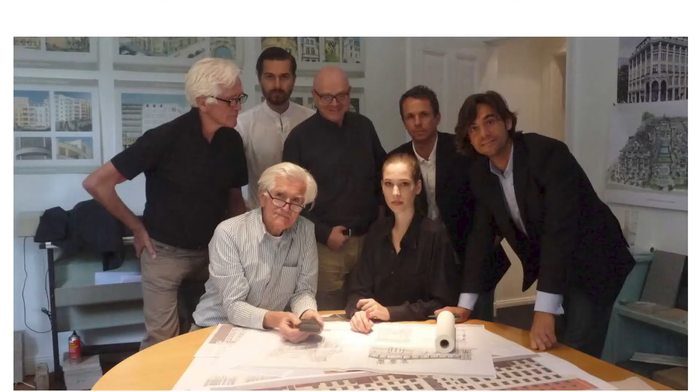And we have two teams. The original head office, where I work with two cousins, has around 35 people, and then we have another team run by my other cousin with almost another 30 people. So it's a substantial size, and we do a lot of projects of all sizes, from small projects to larger projects, and it is fun. I might come back one or two times to the fact that my father and my uncle are identical twins, because that is probably also of importance to me and to the way we think.

Or maybe I'll start with that right now. We started doing more classical architecture around 25 years ago. I was a student at the time, and that led, of course, to a huge controversy and hard fighting and bashing, actually, through the media, through the architectural critics in Germany. And I think if you are trying to face that alone, it's always hard to overcome things.

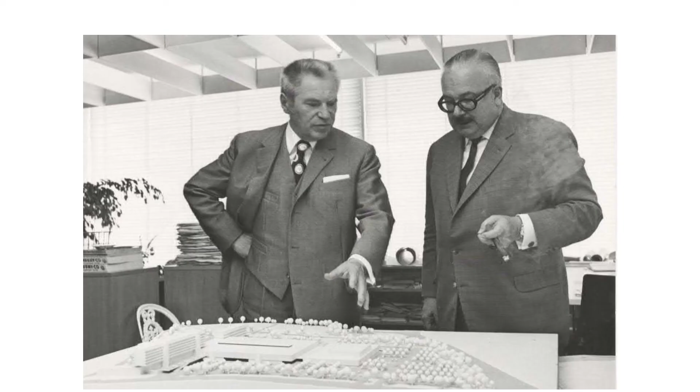Now here in this picture we see, maybe from the 60s, two people, a client and an architect, looking at a large-scale project. And already the way they look at it shows you that there is something wrong with the perspective. We as normal people, when we experience a place, a city, anything in the built environment, we look at it, we walk through it at a normal eye level height, and that is also how we should perceive architecture while we plan it.

And especially in a lot of large-scale projects, skyscrapers, high-rise buildings, big blocks, in the design process you look at the projects from above. You look at the grid of the cityscape, and you take up some lines, and then you create some intellectual concept. But very often, it's missing the part for the normal people to just walk around. And in every design that we do in our office, we do sketches.

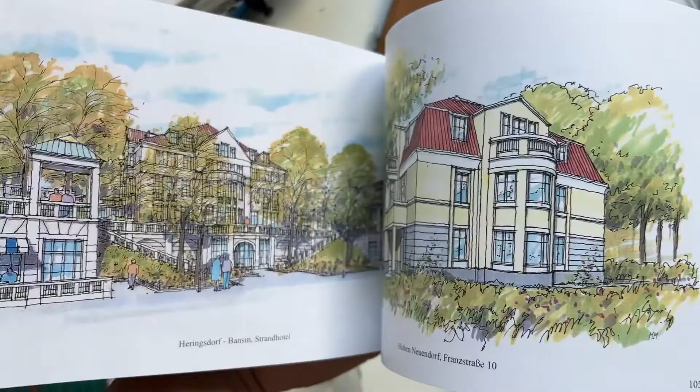I don't have any sketches in my presentation, that's why I will pass around these 2 books. In fact, all the initial concepts in our office we do as hand sketches, because in that way we are not stopped in our creative process, whereas if we were doing it in the computer immediately, then you already have to say, okay, I'm drawing a parallel at 80 centimeter distance. So maybe you want to have a look and just pass it around. It's just a collection of hand sketches.

Another point that I want to get into is what I call granularity. And I'm showing here a contemporary building. Both of it is brand new, just completed last year. It's the reconstruction of the Berlin City Palace, together with an addition by Stella, the new part. And so both of it is new. Both of it has not been there before, or in between it was not there. And I want to take this example to give you an idea of one point that I want to make.

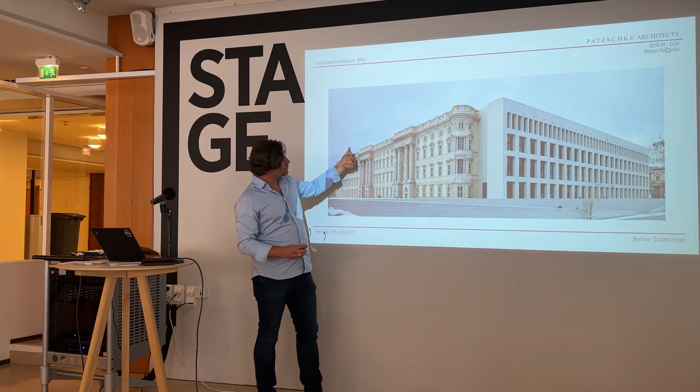And we don't even know where the entrance of the building is. Here it is very clear, and if you go around, you know where it is. Here we actually have to make a signboard to see where the entrance is. Of course, this can also have a quality together. I'll come to that in a moment.

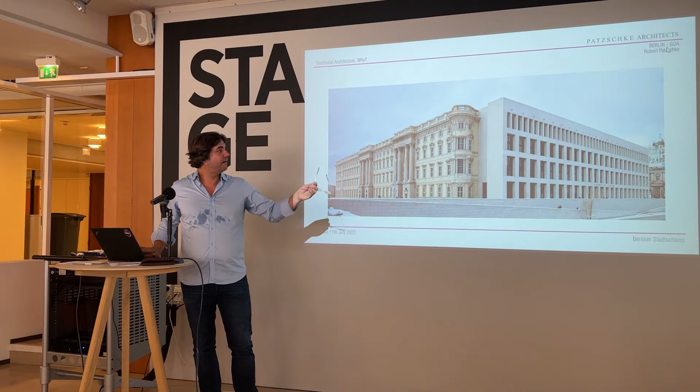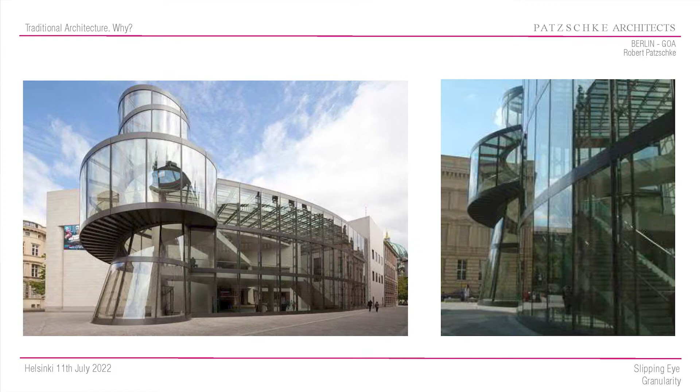So from my point of view, you approach this building from a distance of, say, 100 meters or so. You have more or less understood the shape. In the earlier one, probably even at a further distance. And when you come closer to it, you don't really experience much more. Maybe I'm doing a little injustice to this building because it's a really fantastic example, and in the interior there are some interesting elements. But what I feel here is that after a certain point, you don't experience more, and you lose that stimulus.

And if I walk along this road, my eye just washes away on the glossy surface of the building. Now, of course, these things can go well together. Like here in this particular case, you have the traditional historic building, and you have the modern new building. And again, they can complement each other. But from my understanding, it's usually the classical, the historic building that adds more to that than the modern.

And again, we have here the idea of the granularity of the total entity, because together we can say, okay, it's a great concept, and together it works, but only because we have one part of it that has that complexity in its design. And we can have that at all kinds of scales. We can have that with two buildings next to each other. We can have that within one building. I don't know if you have these examples in Helsinki a lot. In Berlin we build a lot of attic roofs on the old buildings.

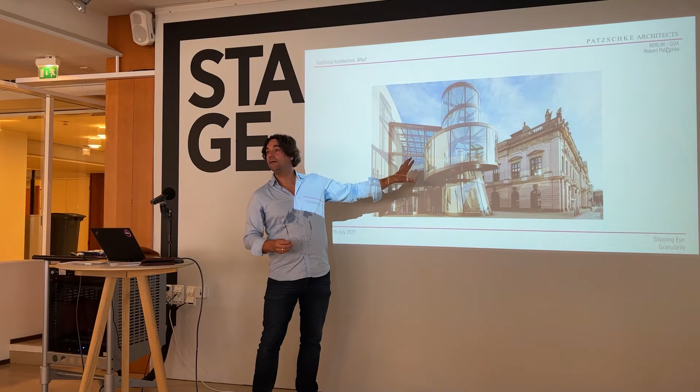So very often you have an old building and then you have a modern roof on top, and that develops an interesting composition. But I feel that if we had a city that was only made of these elements, then we will end up with something that is not satisfactory the way that we see traditional and historic centers.

I mean, I don't know about you, but if I go on holiday to any country, like Helsinki, for example, I look at the historic center. Very rarely I go and see the modern districts. I think in Paris, maybe a few architecture students might go to La Défense to see that, but in general, the people go to the historic centers, and that already shows us that there is something more to it than just beauty.

Now, of course, we have also started with modern architecture in our firm. This is a building, one of the early buildings from 1974 in Berlin from our office. So it took us really a long time to go through this process. But eventually we realized that we have to take a new road, a new path.

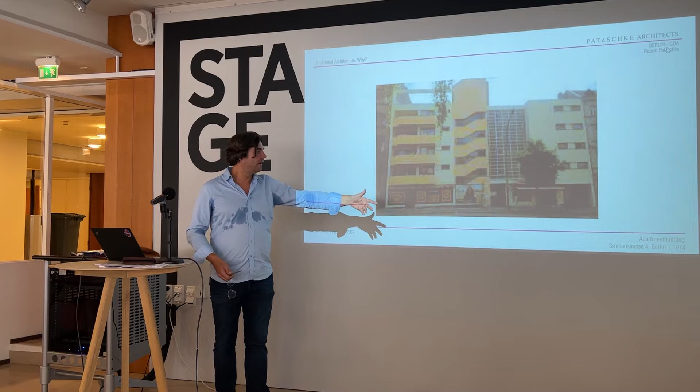So I've already shown you this beautiful building from the 1970s. When I asked my uncle about it a couple of years ago, he said, "Oh God, for 30 years I'm not driving through this street because I hate this building so much." And that shows another very important thing, and that is responsibility. Architects and urban planners have such a great responsibility, because once a building is up, it will be there for a couple of decades. We can be lucky if this building is pulled down now after 50 years, but maybe it will be there another 10 or 20 years.

And that's why I think that nowadays, and that's also how I was trained at university, each student was trained as if he becomes the most special architect. And every time you make a design, it should be something really special. And we in our firm actually want to step back a little bit. Of course, we want to do a project that has quality and that is also exceptional in a way, but it should not necessarily be standing there and crying out, "Here I am." So I think it is more important to look at the responsibility that we have as architects than to selfishly just build one special building after the other.

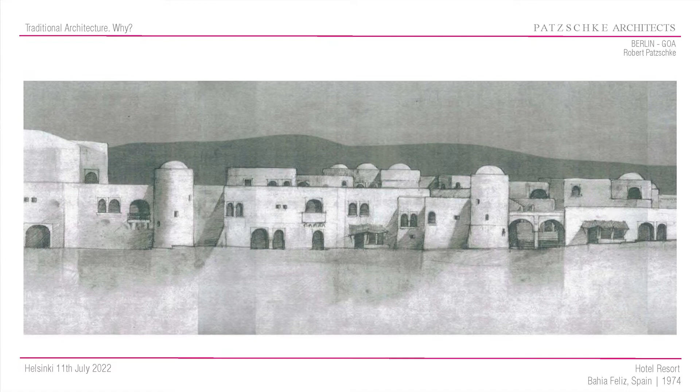Then more or less at the same time we designed, not me, I was 2 years old in 1974, but we designed in our firm a hotel complex in the Canary Islands. And this is probably the first time that we got into a traditional mode because of the location west of North Africa. The idea was to build up a kind of bazaar and get these Moroccan elements into it. So already there was the idea to have something maybe not classical traditional, maybe more vernacular or rural traditional.

At that time, shortly after reunification, the Kempinski group was looking for an architect who could build a new Grand Hotel on the site of the Hotel Adlon. They tried out a couple of architects, but they were not really happy. And then through word of mouth, they landed in our office, which was at that time, of course, much smaller. And we were appointed without a competition directly by Kempinski to do the design of the Hotel Adlon.

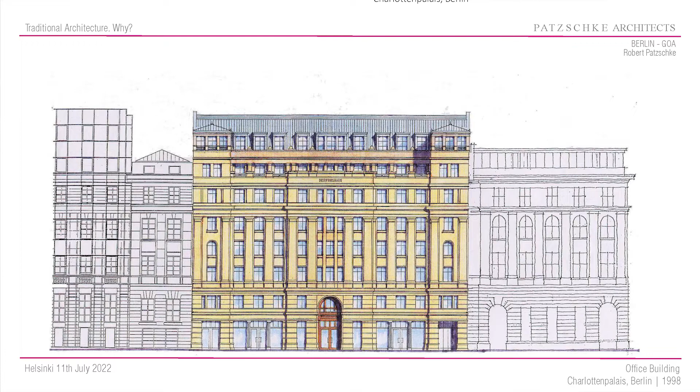Then what we do is office buildings. Our firm is actually more known for high standard residential buildings. But to be honest, traditional architecture is much better applicable to office buildings, because in office buildings like here, you have the possibility to do fairly repetitive bays. That sort of work is more difficult in a residential building where you have a kitchen next to a bathroom and you want a big window there and a small window there. I'll show you examples, of course.

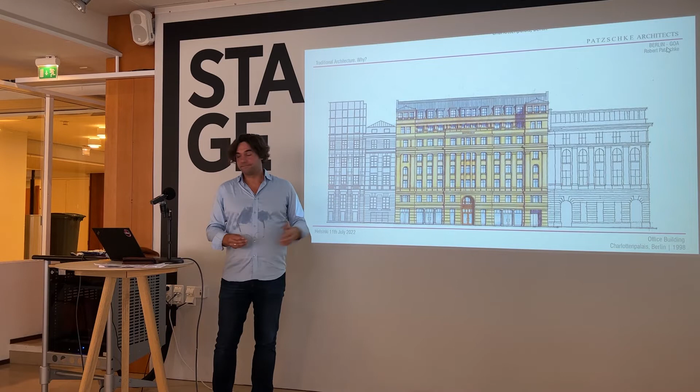So here we have an office building, and this is actually, from our whole portfolio, one of the most classical projects that we did, with heavy natural stone and really intricate woodwork at the door. So here that kind of granularity, that kind of approach, I think, is very visible. You have a building with a main structure with a giant order, and the closer you get, the more you feel the texture of the material, and even when you get in, you have that detail in the main entrance door.

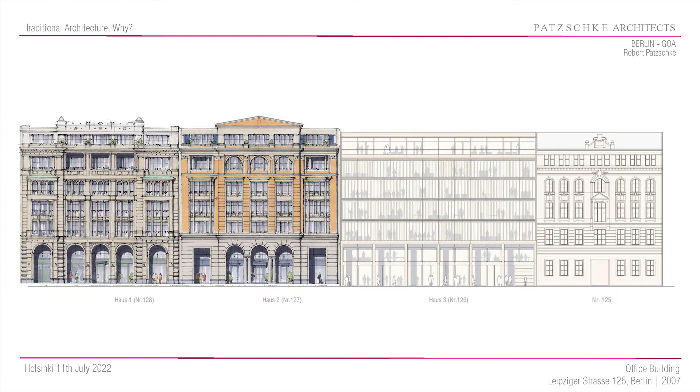How much are you focusing on using the classical elements on the outside of the building versus using those classical elements also on the interiors? It's a good question. It depends really. Usually what we do is condominium apartments in the majority of our projects. And there we usually have the entrance lobby in a fairly classical way. I mean, there are architects that are much more classical than we are. If you look at some of our British colleagues, Robert Adam, they are very elaborate. So we have even in the interior classical elements with a wall cladding and a flooring, but I would say not too much. And then the apartments themselves are fairly simple. And then the buyers of these apartments come with their own ideas.

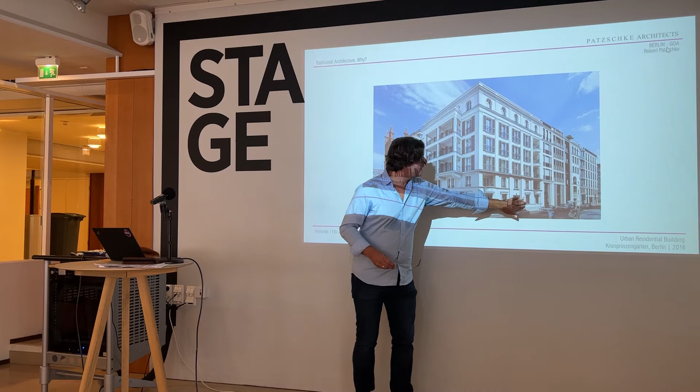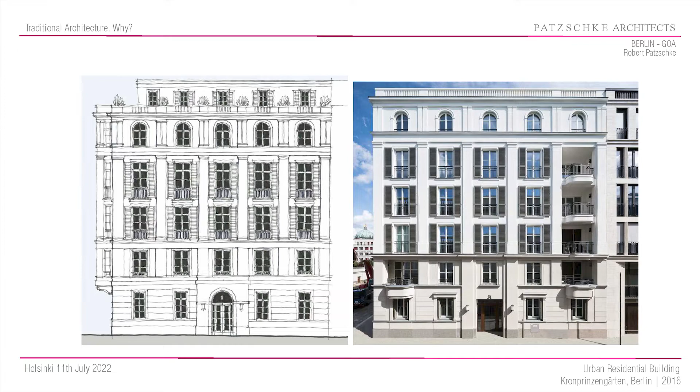Here we come now to residential buildings. Yeah, so this is a larger complex. We've built 2 buildings in that complex. This one here and one small building here, which I'll show you later on. It's interesting here to see the initial sketch and the way that we have built, coming back to readability, and also to the difficulty we actually face here in traditional architecture, because we had proposed a giant order for this building. And if you have a facade like this, you cannot move the window by a centimeter or make it larger or wider. All has to be in exactly that grid. And we see already here that we needed more balconies.

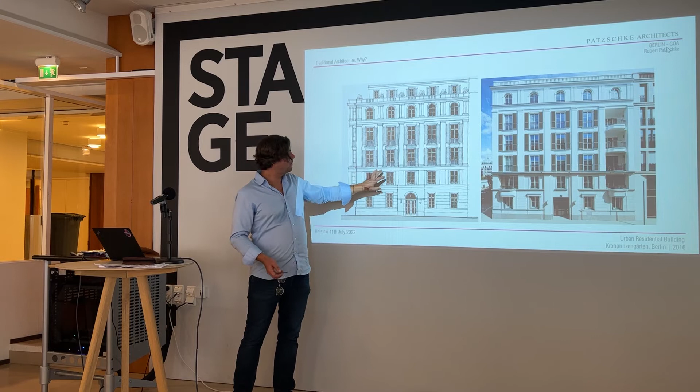There are balconies on that side here, but because there are 2 apartments on each floor, we needed also balconies there. So one bay was turned into balconies. And then on the lower floor, it was even more divided into smaller apartments. So we have that loggia on both sides.

Now, I think at the end, it is also interesting if you have a repetition or symmetry, that you break that repetition or symmetry somewhere, so that you also break that monotony. But at the same time, you can see here that we also end up in a conflict, in a design conflict sometimes.

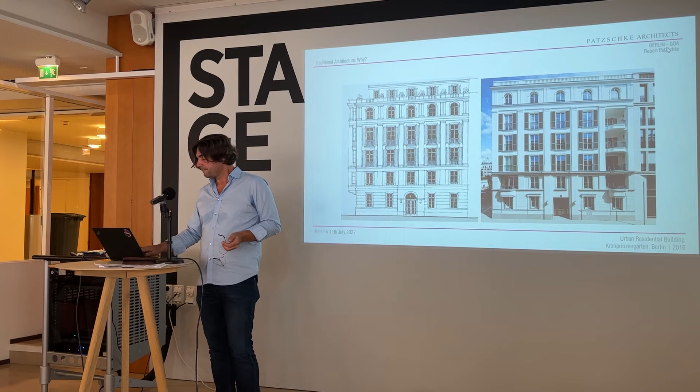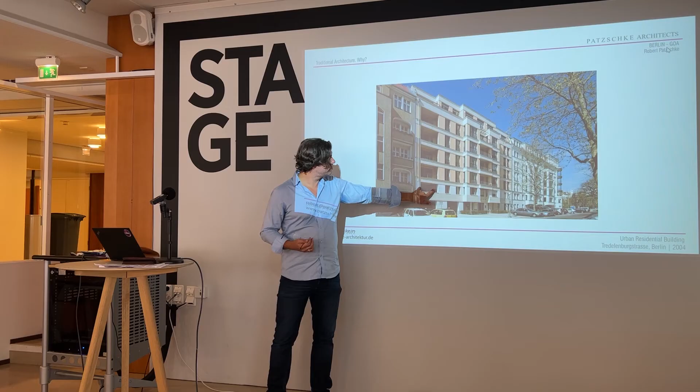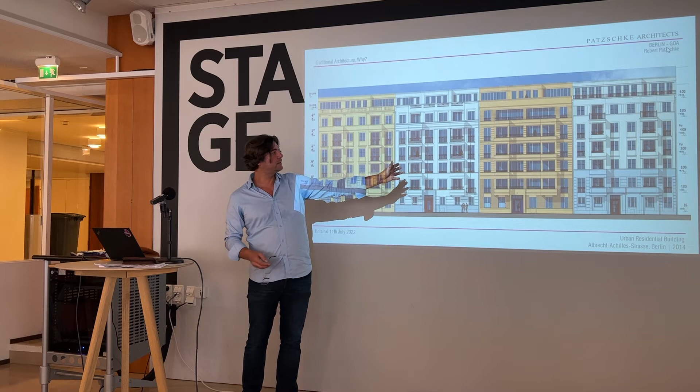And I'm showing this project because it comes back to that idea of granularity, because here this was one site, so we could have also built it as one big block with one architectural language, but deliberately, because this is more or less the typical Berlin parcel or plot size, we've turned it into 4 buildings. They are more or less identical in floor plan, except for the sides, because of the shape of the plot. So we've got a repetition for the developer.

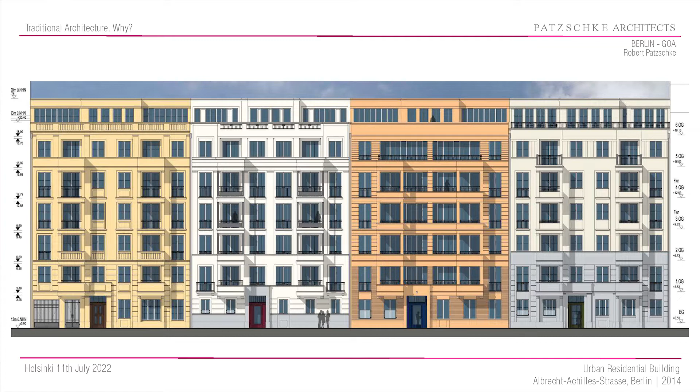We've got that, how do you call it? Come to it in a moment. We have a repetition here. At the same time, we have given each building a little bit of a different appearance with different elements, sometimes with color, sometimes with different elements. Here we have a fixed balustrade, here we have it in a different way.

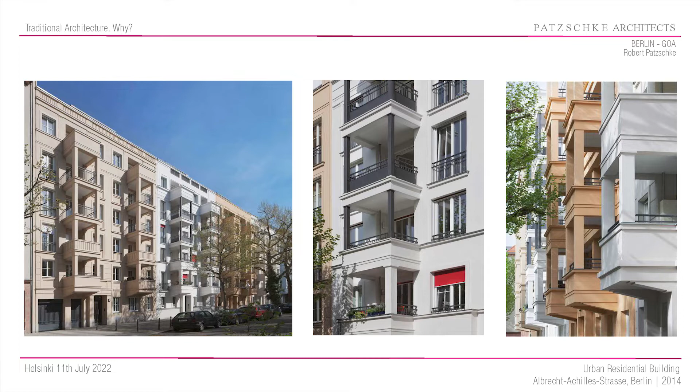And so what happens then at the end, each building has some sort of identification. So if I buy an apartment in one building, I know exactly it is here, and it is not in block A or block B, where I can only find my entrance through the number, but I can identify it with the building where I live in a better way.

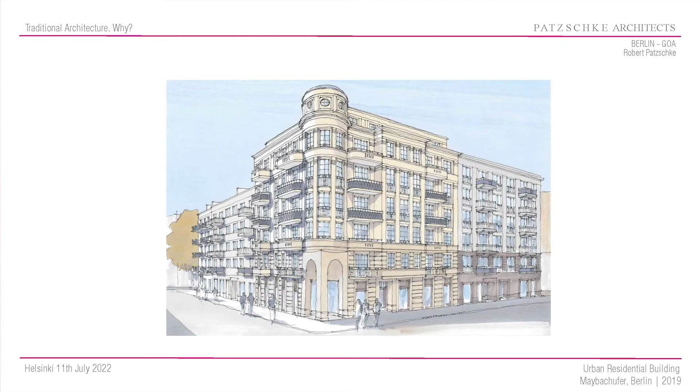Here, one more residential building. This is one of our, not latest, it's already from 2019, but one not so old project. Here you see the early sketch, and this is actually how it came up. So we explore more round ideas. Actually, I don't know if it's also in Allan's pictures later on. It's actually a very common feature nowadays in architecture in Berlin.

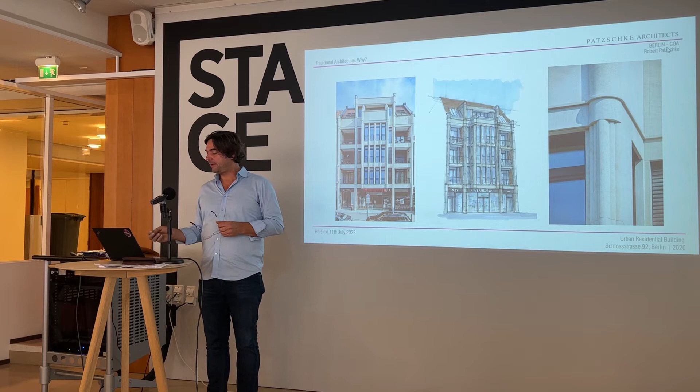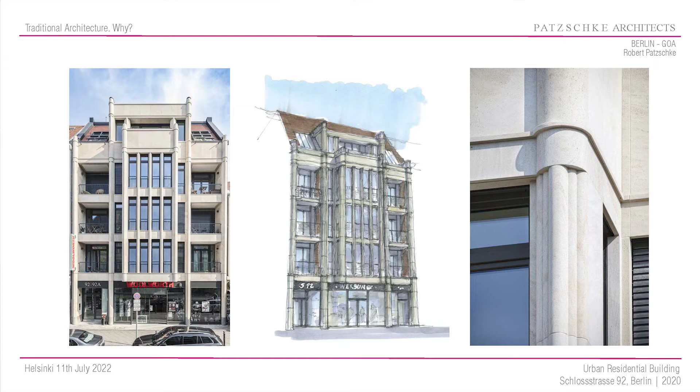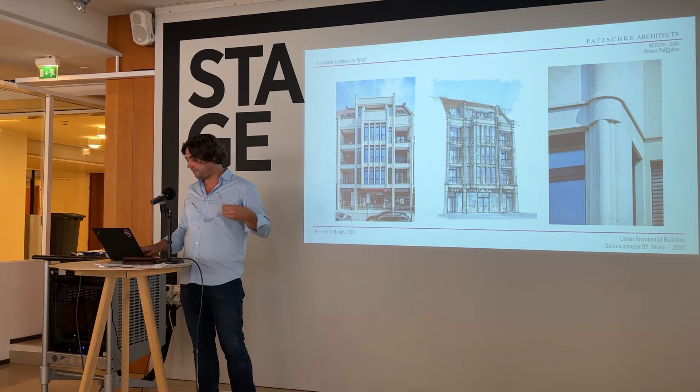Here is another building on one of the high streets in Berlin, and I like this because, first of all, it's all made of natural stone. Right to the top, it's a natural stone cladding, but it also doesn't use the typical classical elements. It is more the idea of, let's say, a 1920s Art Deco, Art Nouveau way of design, and I think that shows also that you don't necessarily need to apply the traditional elements, but you can also play with other new elements or make up your own details.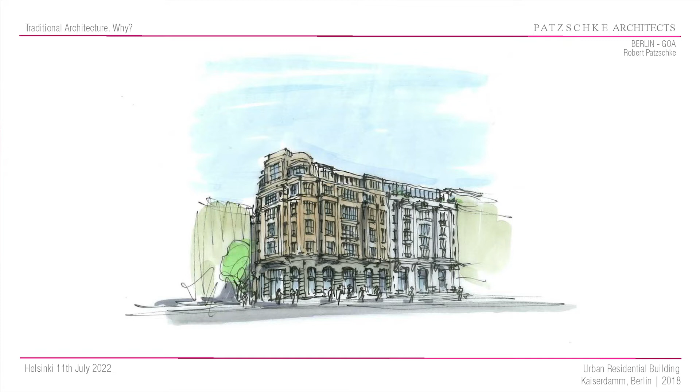One more apartment building in Berlin. And here is a sketch because I wanted to show you the way from the initial sketch to the finished building. So the final building looks completely different, but you can never make the second step before the first. That's the way.

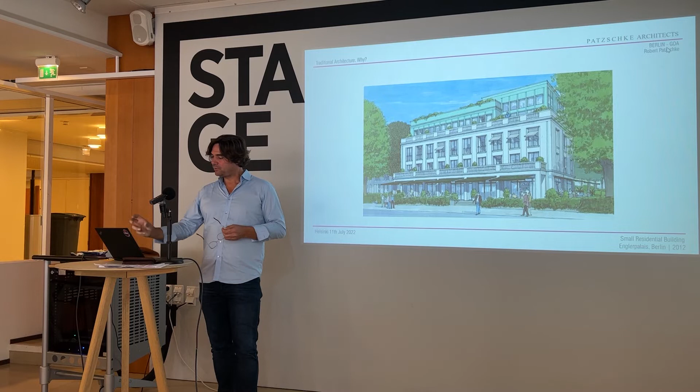Then we come to smaller buildings. This is probably the most modern we get, where we still use a balustrade with some elements, and we have some details here. Well, you can't really see it in that picture, but it is not a typical classical order in any way.

Then these are all smaller residential buildings. This is a complex. Here, actually, if you leave out just a few elements, you see that there's actually hardly anything on it. Yeah, it's actually a very simple building with only a few lines.

And so also a question that we are asked very often is whether our architecture is more expensive than other work. And I always say no, because first of all, we have to compare, as I said earlier, the same quality. So if we compare a good quality modern building or a classical building, we have to compare to a good quality modern building. And both of them have, of course, their costs.

And then the inside of the building, the walls, the floor slabs, the roof, let's say, all the technical parts are also more or less the same. And so it's only a few elements on the outside that make a difference, but it doesn't need to be a lot to make a building nice.

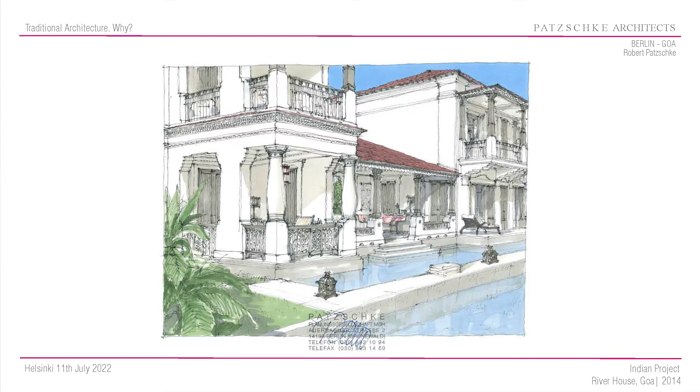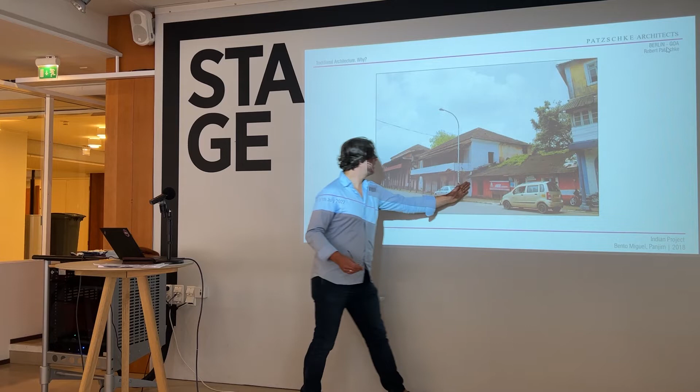So we tried to keep somehow the same proportion. Originally it was ground plus 1, and then the roof. And we have now 4 levels. One is here above. But we have tried to disguise the 4 levels into 2 levels, so that it still doesn't break the scale of the area. And we have also used the same plots as before, because there was a smaller bit here and a larger bit here. So we have used that same breakup into one part here and a larger part there.

And I'm very proud today when I go there. This was shortly after completion, that tourists go there and take pictures, because they think it's an old Goan building.

And I want to come to one more project, which is completely different to all the other work that we usually do, but I'm very proud of it. We have made a concept for the demolition and reurbanization of a piece of the Autobahn in Berlin. And I think this should be the way forward to think about new mobility concepts in the cities.

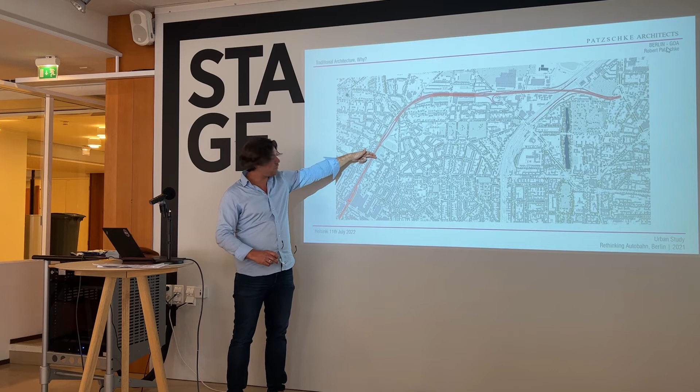And we have identified here that section of Autobahn, which is about 5 kilometers, connecting one Autobahn here with another Autobahn here, but it's actually redundant. It doesn't serve a lot of purpose because it was never completed in the first place, because already in the 80s people stood up and said, no, we don't want it. So actually the Autobahn stops here, then you have a 30 kilometer per hour zone here, and then it starts again. So it's completely useless, and it actually only destroys the area.

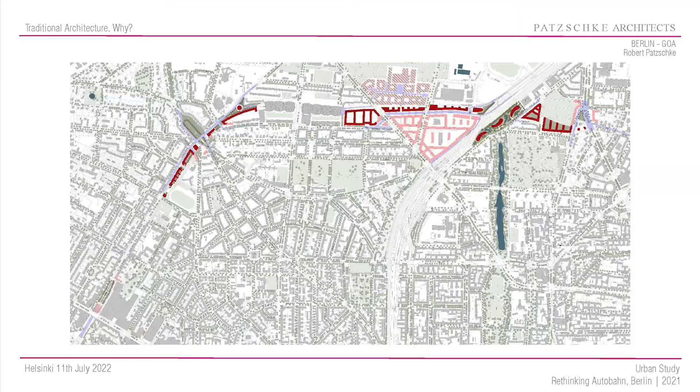And we have made a concept of how to reuse that space in an urban context. And we have identified that you can build here around 6,000 apartments right in the city center of Berlin, rather than have this piece of Autobahn. And we are proud because it actually landed in the coalition agreement of our current government that was formed by the end of last year.

And then the last project I want to show, where I'm also proud of, is a small project. I showed it earlier. It was part of the one complex where we actually won a prize, which is very rare for our firm. And it was a prize by the BDA, Bund Deutscher Architekten, which is a very modernist association of architects.

And some of my traditional colleagues have tried to get in, and they were rejected. And we have never even applied to it. But they have a competition every 2 years or so where you can hand in work. And they have a jury, and with that jury they issue a couple of prizes, and then they have one prize called the People's Prize. So people can go onto the website and say, this is what I like most.

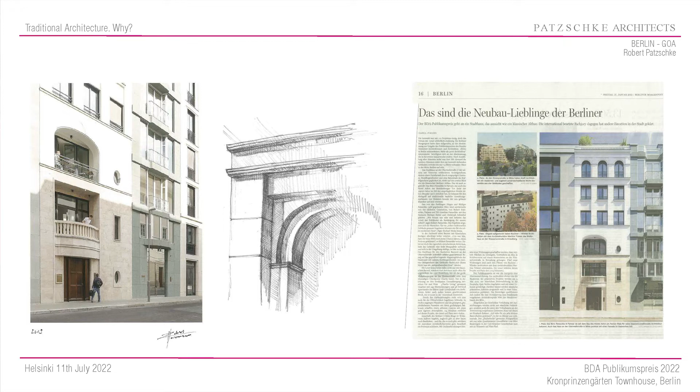I want to wrap up with two things. One is a quote from a book of an author called Jan Gehl. He wrote a book called Cities for People. And he had one beautiful sentence there, and that is, I have to translate it into English, first we design our environment, and then this environment shapes us.

So the past 20, 30, 40 years or more than that, since World War II, architects have been shaping our environment, and this environment has then again had a huge impact on us. And I think in some of the living areas, if I look at some of the areas in Berlin or the banlieues in Paris also, that impact was probably not always the best.

So first, it's our choice to design our environment, but then the impact that comes back, we have to face. So I think now it's a turn that we have to change the way that we design our environment, and hope that it will have a better impact in the future.